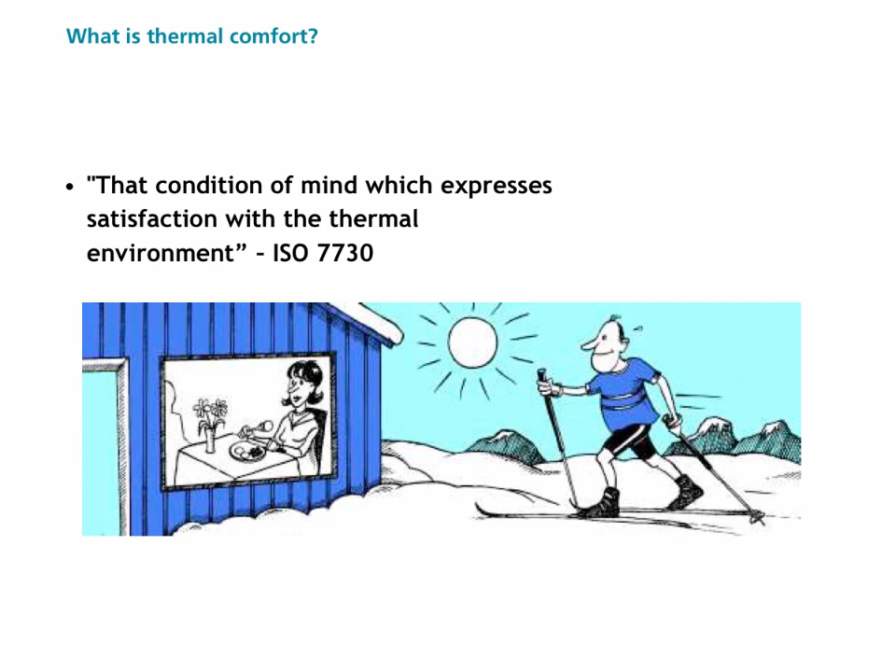You might ask, so what? What does comfort have to do with architecture, and can we say anything meaningful about the conditions people find comfortable? And if we could, then so what? How would that change design? If the proposition here is accurate, that is, if we could define the conditions that create comfort in some empirically based way, in a way that is statistically significant and replicable, would that be useful? Would it change something about how we design?

Well, one thing it might point to is the fallacy of a kind of radical relativism popular today. You've heard the "it's just your opinion" argument about design. It would also suggest that there's some knowledge available to designers to inform their art. It would say that while formulaic determinism is maybe not possible, neither is absolute radical pluralism, at least with regards to architectural design responses that shape buildings to bring about that condition of mind which expresses satisfaction with the thermal environment.

So let's start here. This is the bioclimatic chart. It was developed a number of years ago and modified by various people, including Ed Arens and others at Berkeley, and originally Victor Olgyay in his highly influential 1963 book, Design with Climate. It basically says that comfort can be defined as the combination of variables: temperature, humidity, solar radiation, shade, and air movement, and so forth. And in the middle here we have what's called the comfort zone.

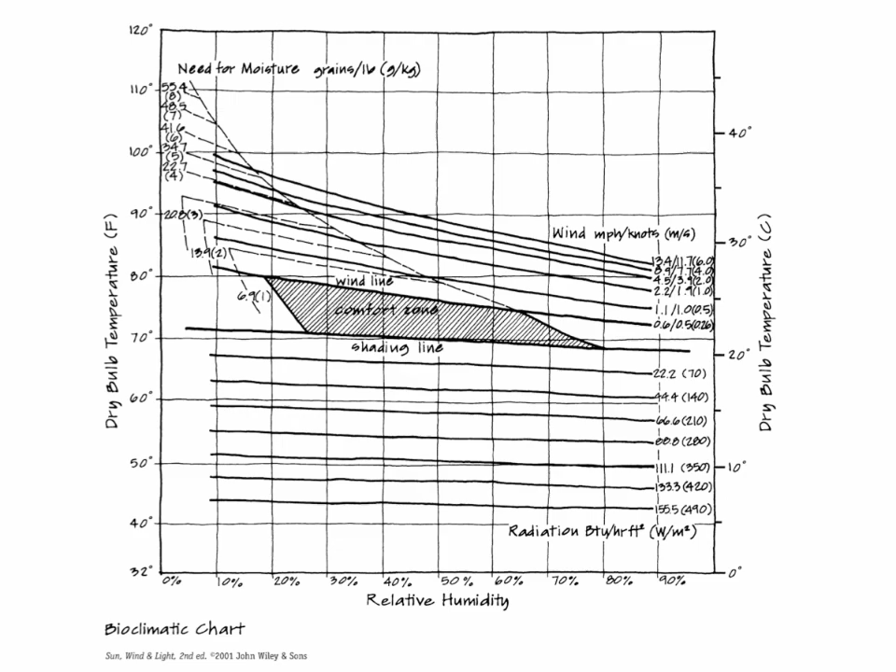So let's break this chart down. Basically, if you're above the comfort zone, we say you're too hot. If it's below the comfort zone, then it's too cold. Notice there's a shading line. So if we're in the comfort zone, that says that we're in the shade, and if we're above the comfort zone, we'll also assume that you're in the shade. Also, there's a wind line at the top of the comfort zone, so conditions in the comfort zone require that wind not be moving.

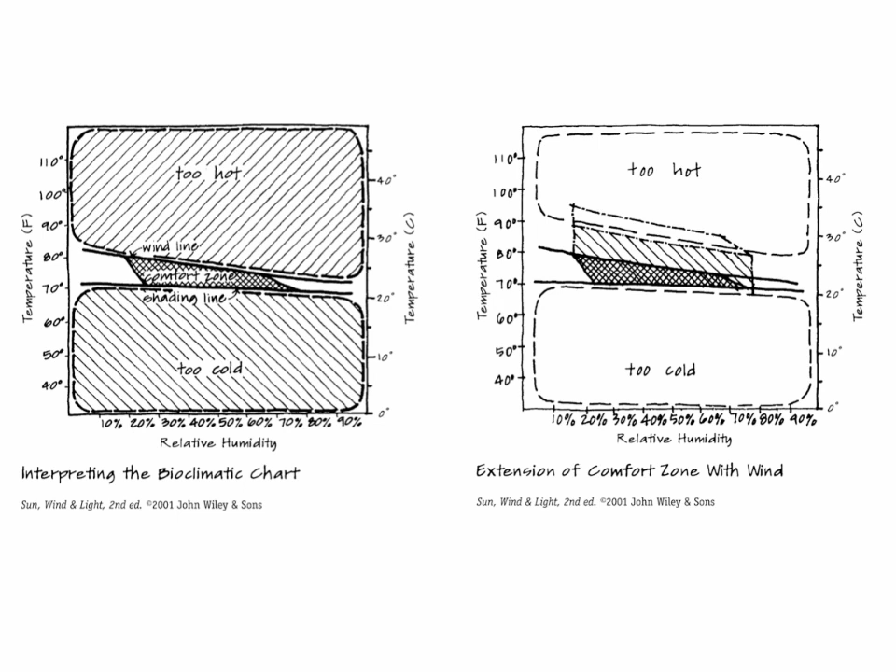If you add wind, then you're going to feel cooler. And this can be a positive or a negative depending on where those conditions lie. However, we can look at this diagram on the right, the extension of the comfort zone with wind, which says that if you add wind or air movement of some kind to conditions that are above the comfort zone, within some limitations, you can expand that comfort zone or sort of slide it up into the warmer regions so that conditions that ordinarily would be perceived as warm or hot would suddenly become comfortable.

The same thing can be said of adding radiation or sun. Again, looking at the diagram on the right, the bottom of the comfort zone can slide down into colder conditions if we add increasing degrees of solar radiation. So if you're standing out in the sun, even though it might be cool, you could still be comfortable.

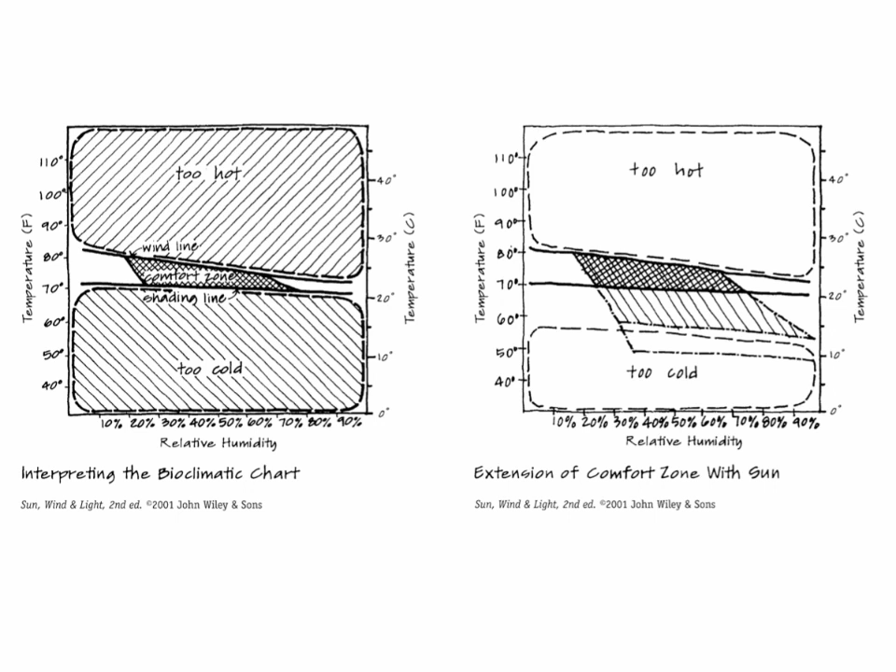And the third expansion of the comfort zone is with evaporation. So again, looking at the diagram on the right side of the screen, notice that the expansion of the comfort zone this time, that is the single hatched area, extends mostly over to the left side of the graph, that is the area of low relative humidity. So if it's hot and dry and you add moisture through evaporation, that's something we call evaporative cooling, then you will take those conditions that are perceived as warm and dry and they may be perceived as comfortable.

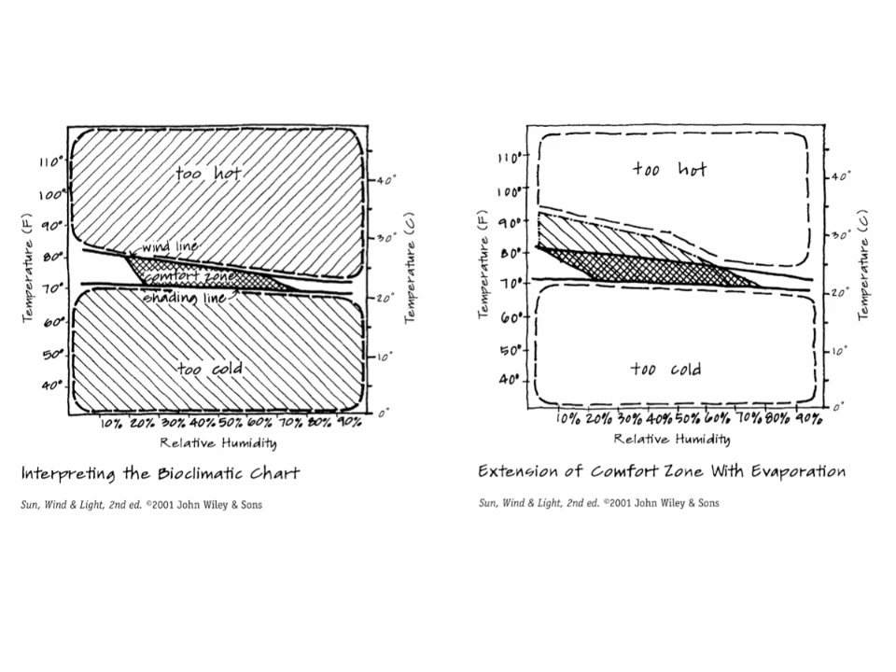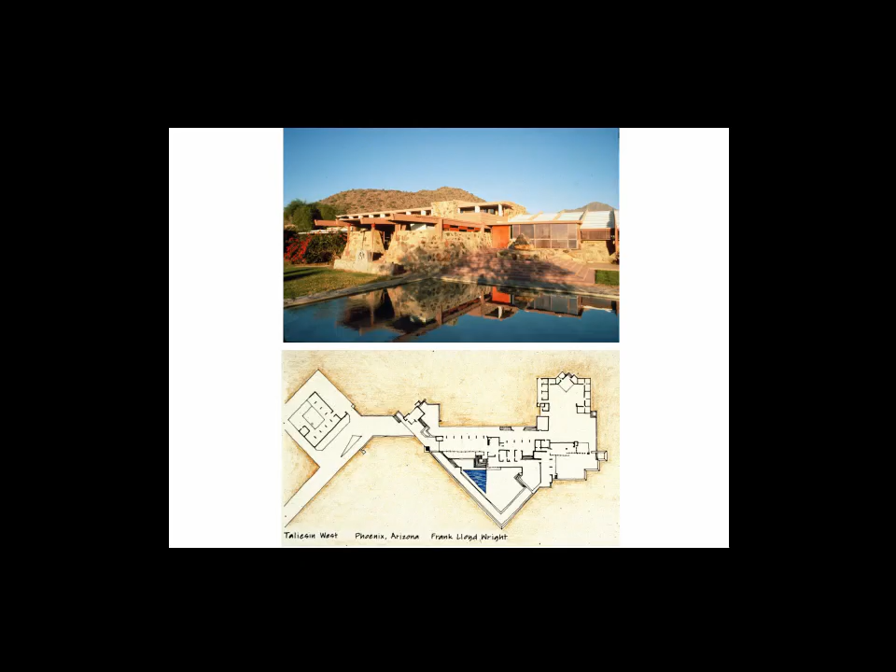Let's look at what drives the climate that we find in different places, which, as Corbu illustrates, can either be the friend or the enemy of architecture and its inhabitants. Climate is a fundamental force acting on buildings, and the sun is its most powerful agent. In the hot and dry climate of Phoenix, Frank Lloyd Wright initially designed Taliesin West as a winter retreat. Yet it has many hot and dry climate adaptations, including massive walls, shaded outdoor circulation, and a range of spaces with variations in enclosure that can be used at different times of the year. The pool that you see is also strategically placed for the breezes to cross it before entering the building.

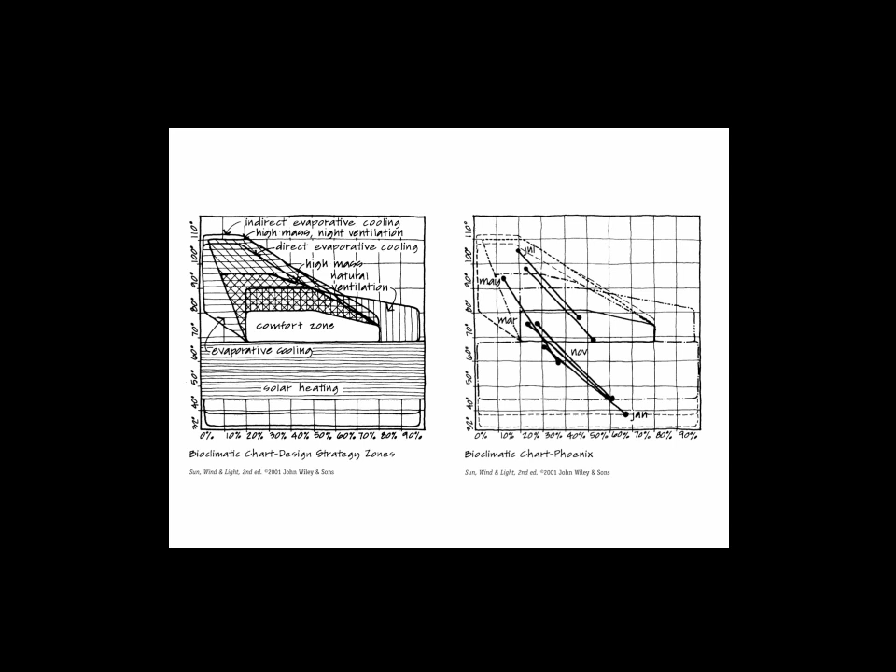Phoenix is hot and dry, but as you can see, it's also cool and dry in the winter. It has mild temperatures and plenty of sun, so most of the building can be heated just by passive solar. In summer, the temperatures rise well above the natural ventilation zone, so evaporative cooling and night cool mass strategies become necessary.

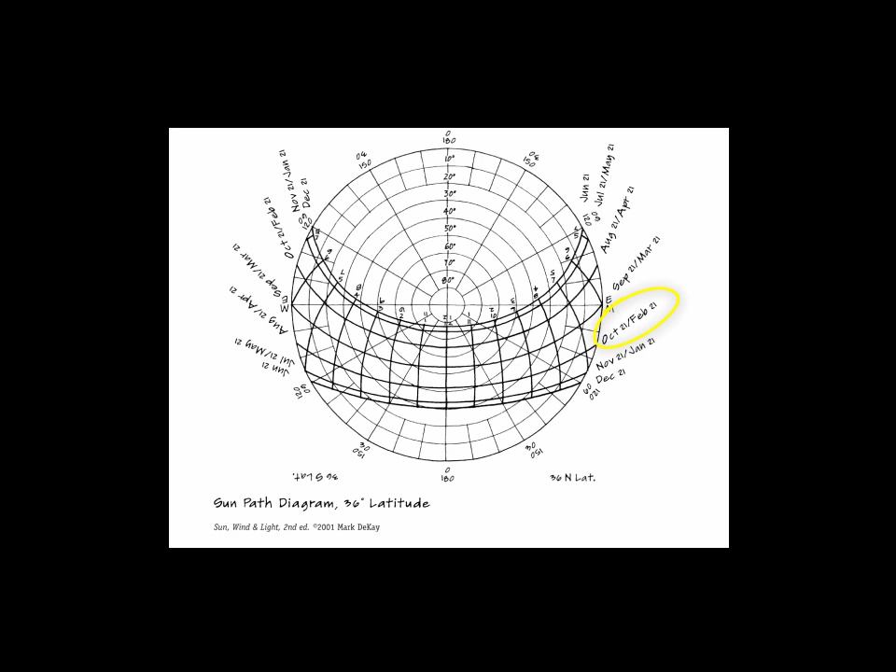Note that except for December 21st, the winter solstice, and June 21st, the summer solstice, each monthly line represents sun angles for 2 months on opposite sides of the solstices. For example, October and February have the same sun angles. Turn the chart upside down if you're in the southern hemisphere.

The sun and its path drive the climate. The sun is also a fundamental driver of design. The ancient Anasazi at Mesa Verde found relief from these seasonal extremes by locating their settlement under a large south-facing natural rock overhang. This provided significant shade in the summer when the sun is high and allowed their high-mass buildings to be heated by the sun in the winter.

They also used a high-mass construction, which helped to delay the heat that did strike the buildings into the evening, and they also used a pattern of migration, so they would go out and sleep outdoors in the cooler evening.

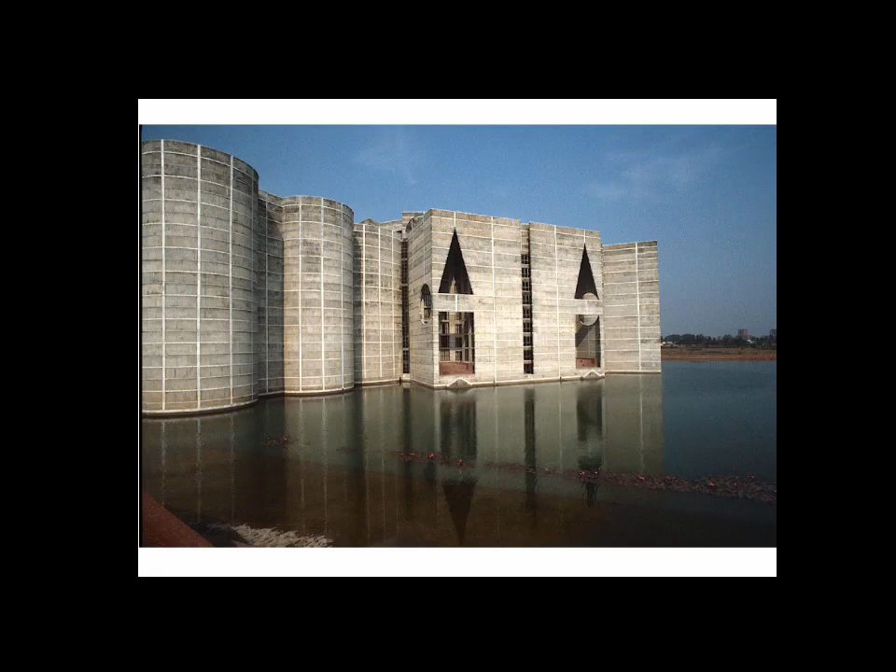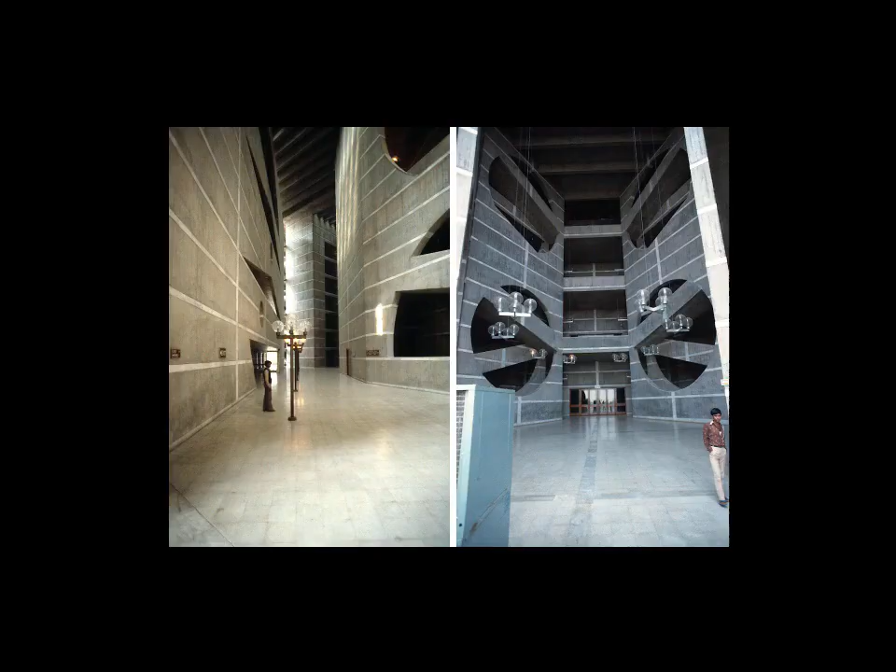Louis Kahn used layers of shading in the National Assembly building in Dhaka. Light is either reflected from shielded clerestories or from windows that face relatively protected outdoor spaces. So you can see there's no outside windows here facing the sun. The windows are set back inside those little courtyards, or they're coming from above in some kind of shielded way.

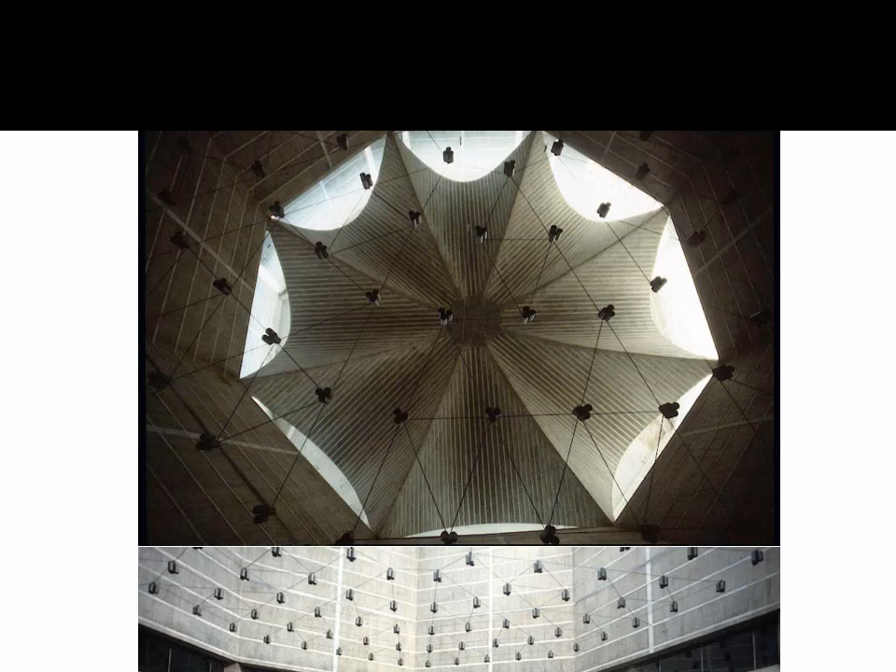The result is a cooler, massive, shaded interior that's lighted indirectly. Notice that the source of the light is obscured, reducing both glare and heat gain from the intense Bangladeshi sun.

In hot climates and moderate Mediterranean climates, one will often find shaded, unconditioned exterior space or circulation, as in this building by Anant Raje in Bhopal, India. This is the Institute for Forest Management, and it doesn't have any heated or cooled circulation. Instead, the architecture has a looser boundary between inside and outside. All along this corridor are open-air seating areas with securable rooms that open onto it.

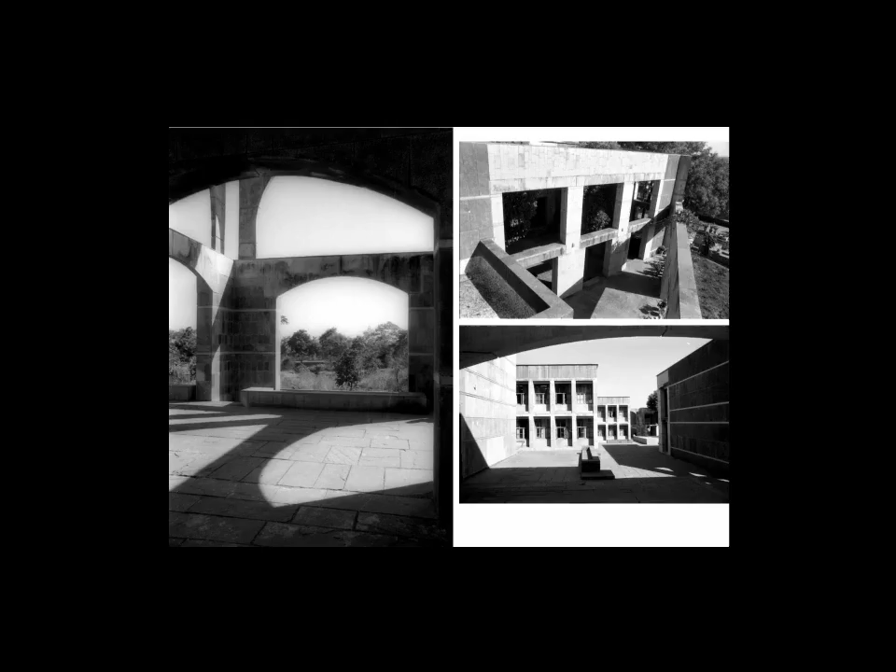There are also more variations in Indian architecture in the enclosure of outdoor rooms, such as the left image, a 2-story outdoor room defined by concrete and stone arches. The interior spaces are protected by many variations on spatial layers of shading. A window is never located on the outermost skin.

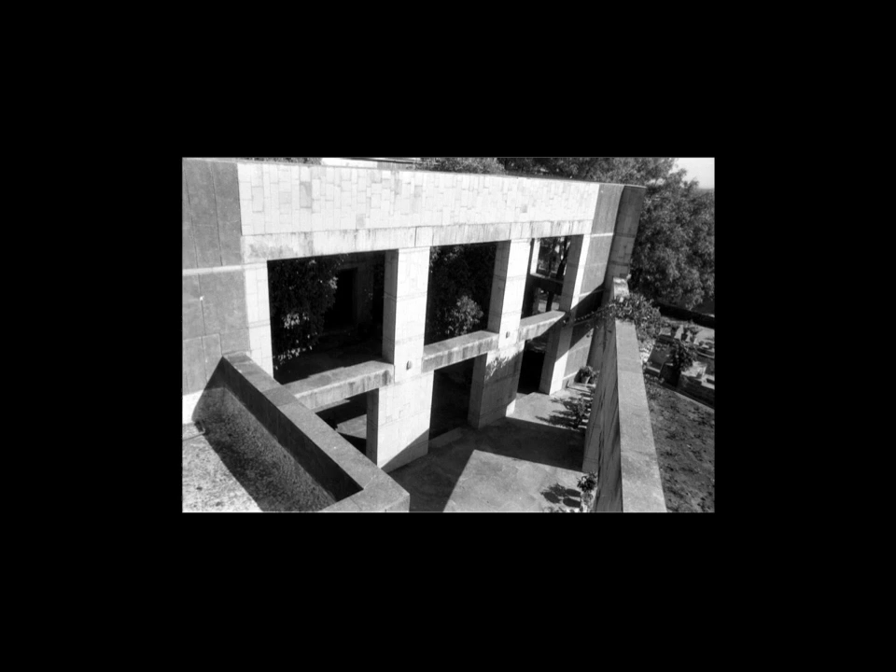So see in the upper right, there's an entire almost additional facade on the outside of the actual enclosure facade that holds the windows. And then in the lower right you can also see there's a kind of grid of space that projects in front of the windows to help to shade them. And the windows themselves don't reach all the way down to the floor because it'd be too hard to shade them there.

Similarly, in Gandhi's house at the Sabarmati Ashram in Ahmedabad, again in India, the circulation is organized around the edge of a courtyard and under an arcade. The largest and most public room for receiving visitors is completely open on one side. So this is an architecture that's born of a hot climate with no use of cooling machines.

Remember and practice your solar yoga. The solar yoga technique is one way to always remember the motions of the sun and to integrate that into your body. Returning to our climate types, cool climate buildings are first about reducing heat loss and then also about increasing solar gain and storing it.

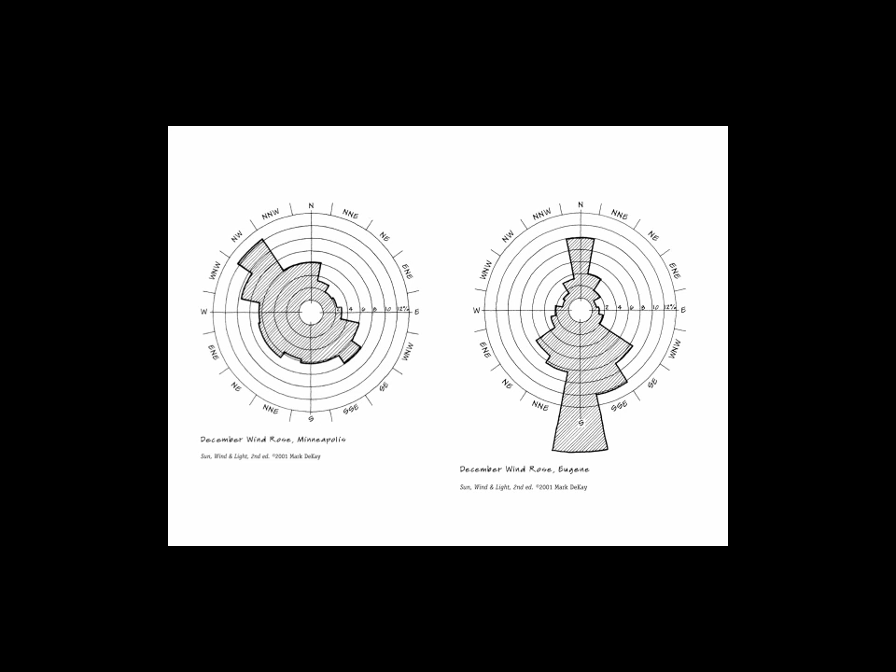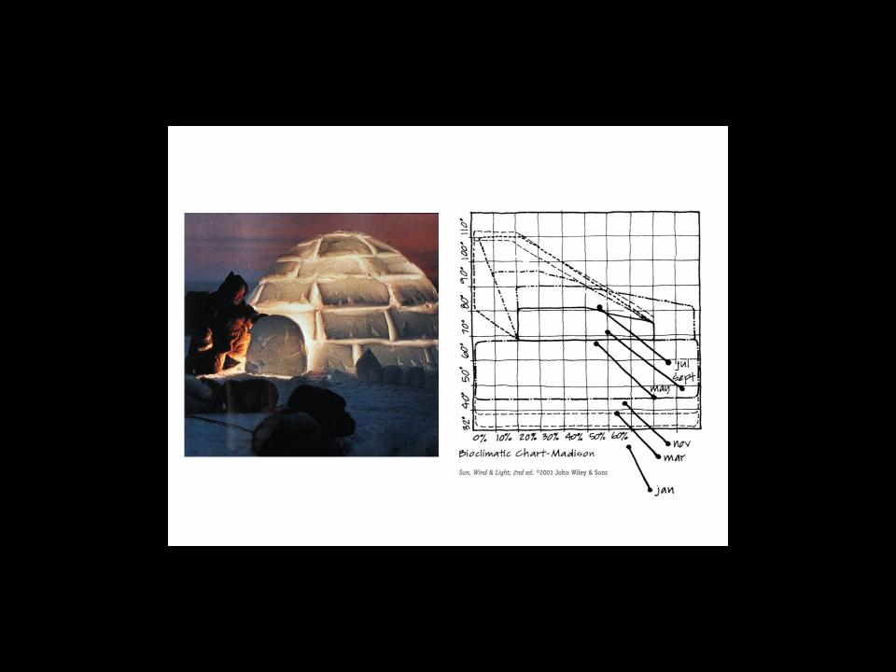The igloo minimizes the ratio of skin area to interior volume. So less surface area means less heat loss. On the right is the bioclimatic chart for Madison, Wisconsin, which shows winter days below freezing and the warmest months of July just barely breaking the comfort zone. So clearly reducing heat loss and increasing solar gain are priorities in that type of a climate.

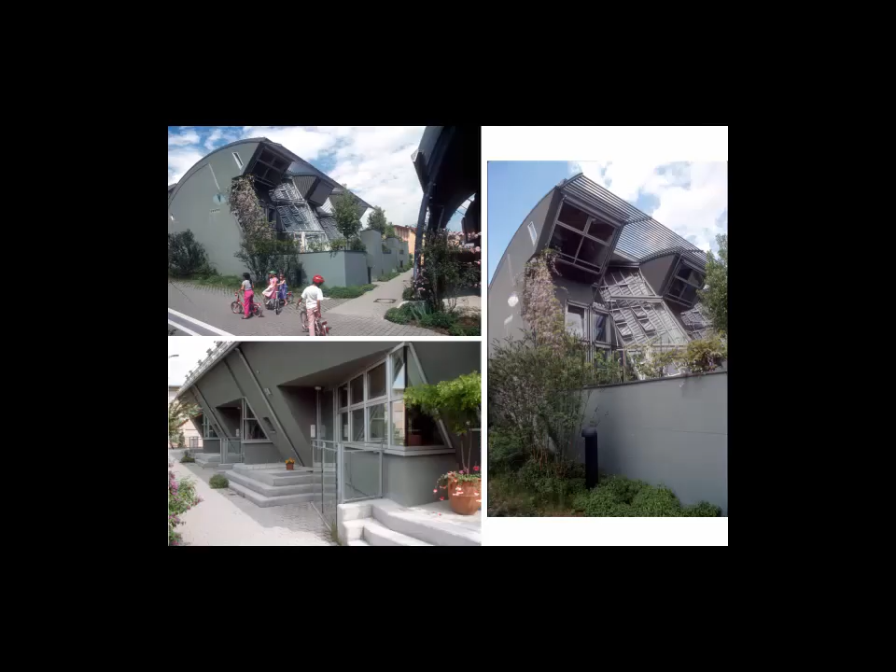This project points up the importance of orientation. These are row houses in Stuttgart, and the street itself is not ideally oriented for winter solar collection, so it's not oriented on the cardinal directions, and so the south collection area and the south facade is canted towards the south to increase the collection of that winter radiation. And note that there's also overhanging shading on top and operable awning windows, and there's some retracted operable shades that you can see for use in summer.

The lower left image shows the north side, which has much less glazing. So the glazing is really always going to be a net thermal loss if it's on the north side, whereas on the south side it's actually a benefit.